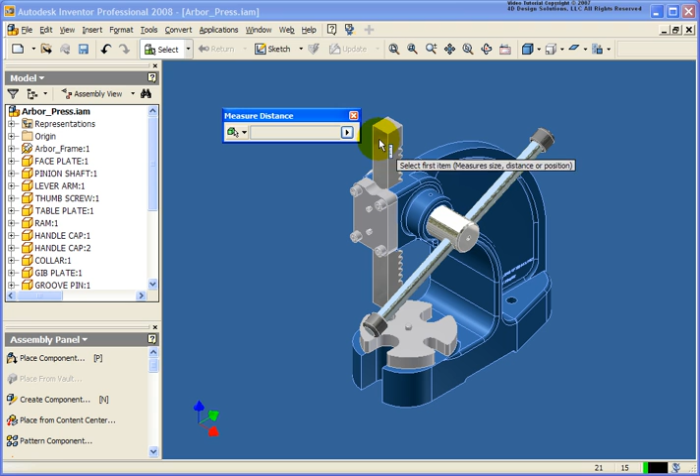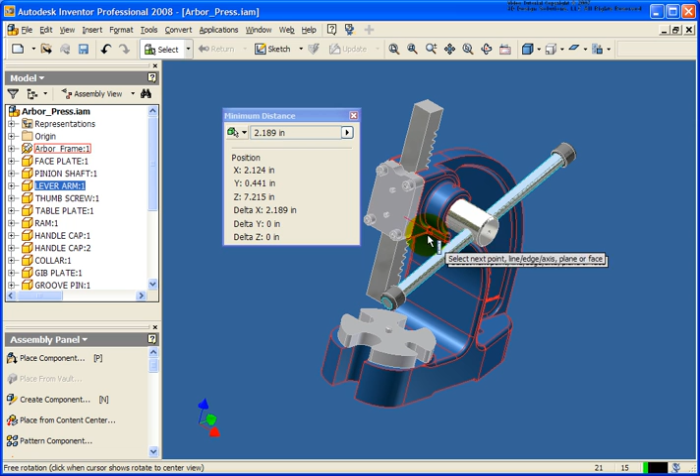If I come back here and select a specific component, you'll notice it changes to minimum distance. If I select a second component, it says minimum distance, and a red line appears inside the graphics window. If I spin the model, you'll see I'm getting the minimum distance between both of those selected components. So that's what's going to happen with the part or component priority — we'll get a minimum distance between the selected components.

The measure tool can also be taken by right-clicking inside the graphics window and clicking Measure, and again Measure Distance. I'm going to go back one more time.

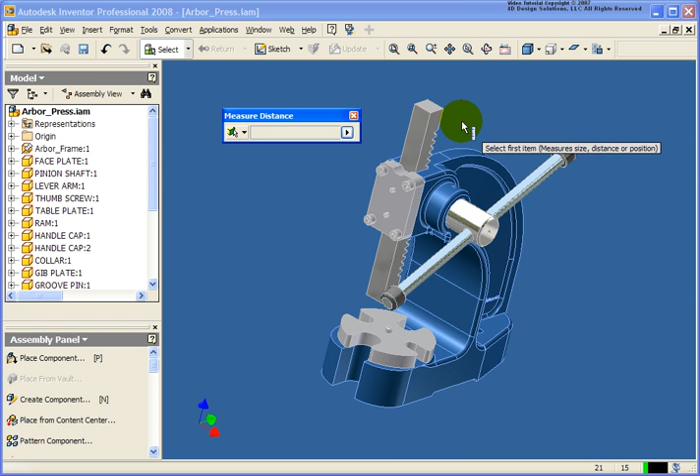Let's see what happens when we select the select faces and edges option. In this case, it would be just like working inside a part. This is where I can select individual points, edges, as the case may be. You can see the two different points I selected — this happens to be 4.861 inches across. If you go a little further down, you can see how that's broken down into X, Y, Z.

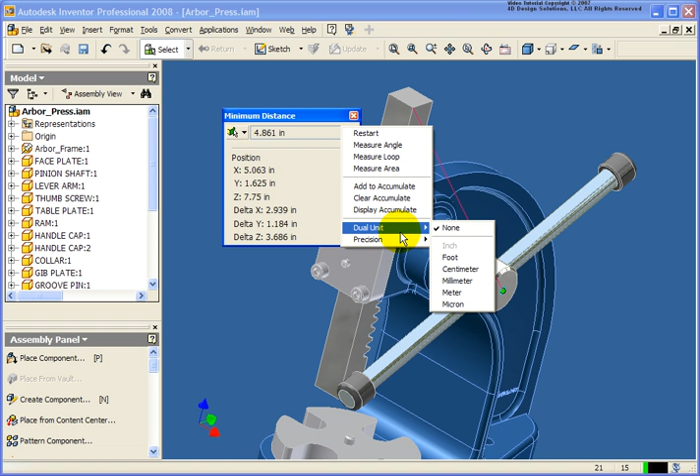Just like you were able to do in the part environment, if you expand that, we can go back and add this to the accumulate, clear it, or display it. Also have the different units and the precision, all available here as well. So let's close that back out.

Again, under the Tools, the Measure Angle — select two specific faces, or a face and an edge, and you're going to get that angle between them, just like you would expect.

Also, the Measure Loop. If I come back here and select that face, it's going to give me the loop distance around that.

And of course, Measure Area. Again, select a face, and we're going to get the area of that specific face, even though it's inside a part that's inside this assembly here.

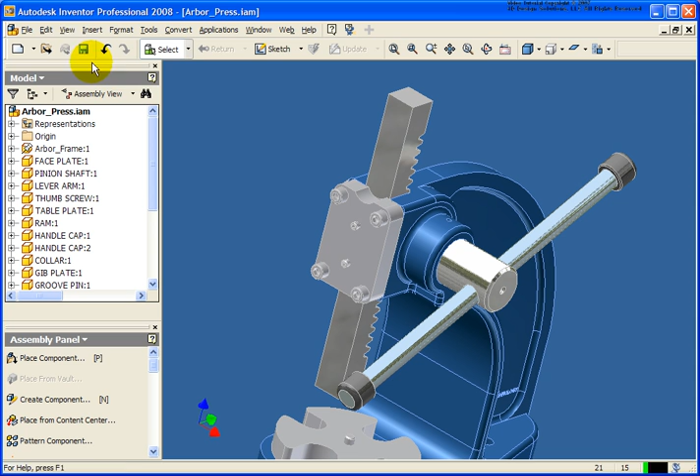Next, let's take a look at the center of gravity. If I go under the View pull-down menu, I can slide down and click on Center of Gravity. In this case, it's telling me it's out of date. I'll go ahead and click OK, and let me back off the model a little bit.

You see that we get the triad showing us the X, Y, Z. Red is going to be X, green is Y, and blue is going to be Z. This value here is going to be relationship to the 0, 0, 0 of this specific part.

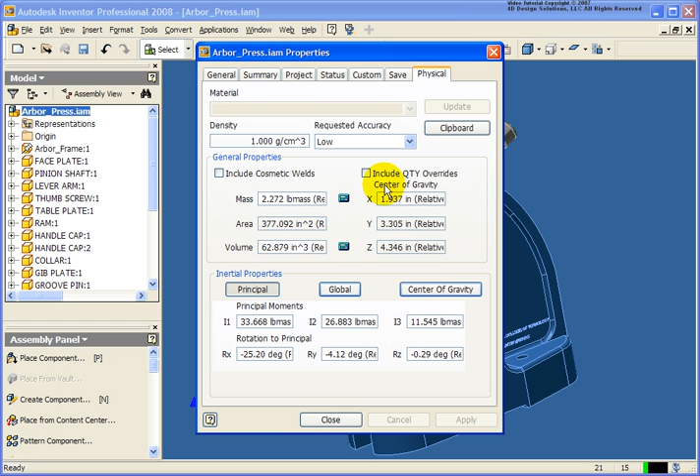Now, there's a couple different ways I can find out information about where that actually is. If I right-click on the file name in the browser, click iProperties, or go under the File pull-down iProperties, then under the Physical tab, click on Update, and you see I get some information about the center of gravity.

Now I can also go back and see that inside the graphics window. If I change my priority level back to Feature or the Select Face priority, and move my cursor back over that, you'll see I get the pop-up window telling me exactly what the center of gravity is for that specific assembly in this state.

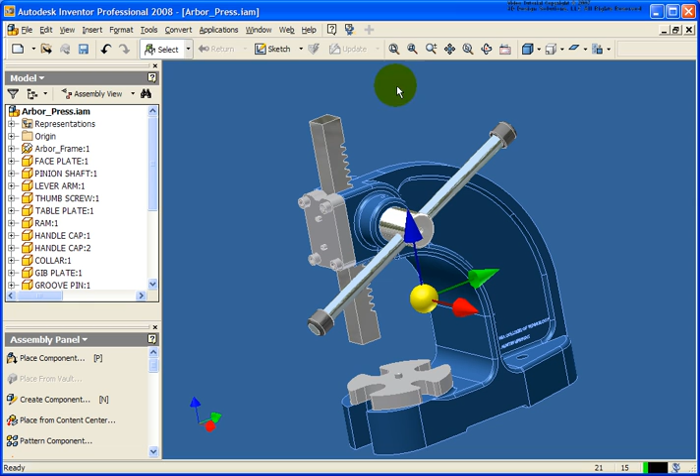Now, if I grab the part here — let's change this back to part priority — and I grab the handle and spin it around, you'll see as soon as I do that, the center of gravity grays out. That's telling me the center of gravity is no longer up to date.

If I go under the Tools pull-down, at this point I can go back and click on Update the Mass Property information. Once I do that, it's back to the regular colors where I can find out information about the center of gravity.

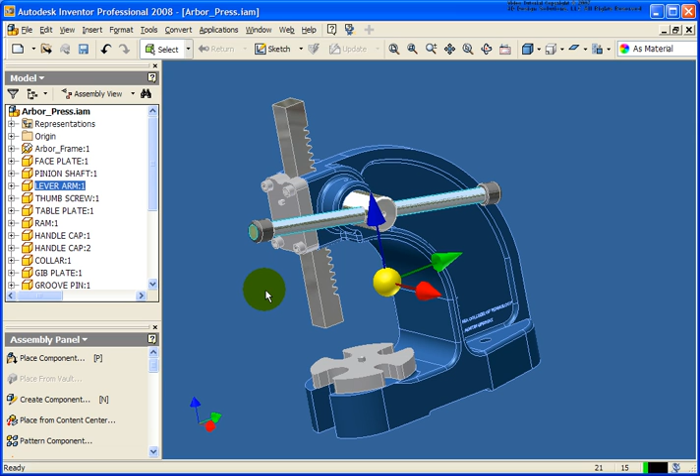So let's go back and click under the Tools, and let's analyze the interference. In the dialog box, I can set exactly which components are going to be defined for Set 1. In this case, I'll just select a couple of components. I'll click on Define Set 2, and add a couple of components for that set. When I go ahead and click OK...

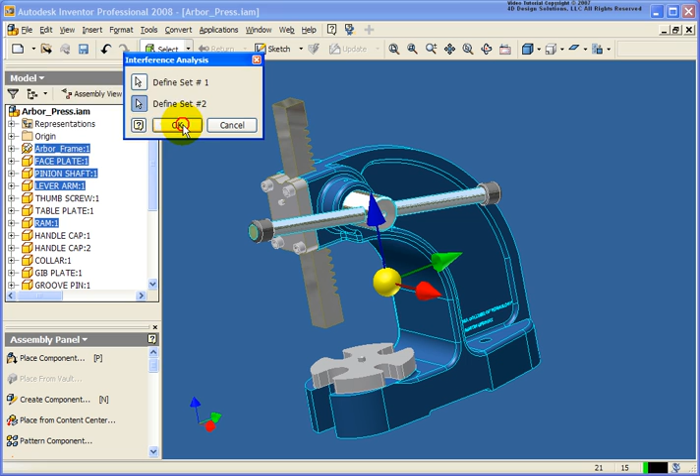Inventor in this case did detect some interference, so I could expand the dialog box and get information about where that interference is. If I move the dialog box over, you'll see it's also highlighting in red, showing me where that interference is.

One more way of doing the interference — if I go back under the Tools, Analyze Interference, I could also put all of the components into one set. When I place everything into a single set, Inventor is going to analyze every component back to every component, which could take a little bit longer. But in this case, we get the exact same results as we did before.